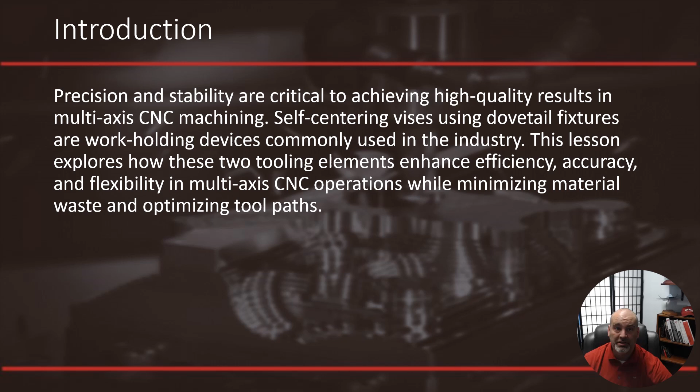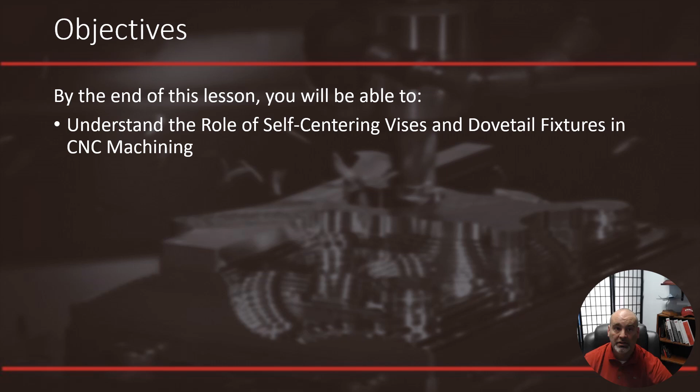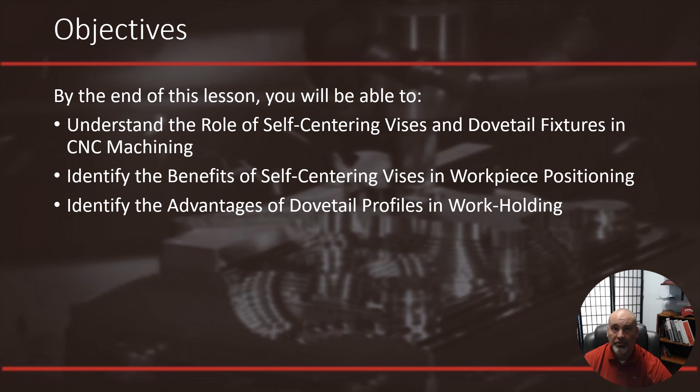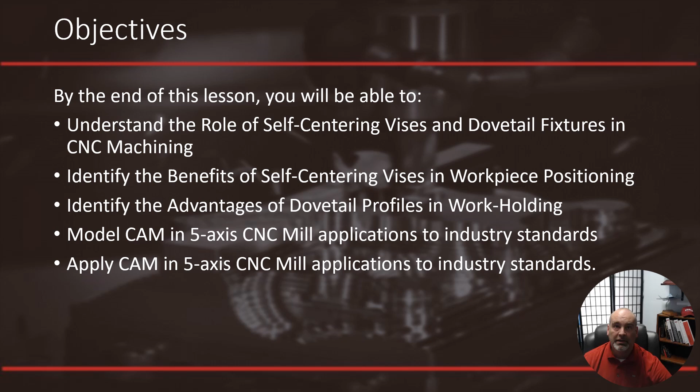The objectives of this lesson are that by the end of it, you will be able to understand the role of self-centering vices and dovetail fixtures in CNC machining, identify the benefits of self-centering vices in workpiece positioning, identify the advantages of dovetail profiles in work holding, model CAM in 5-axis CNC milling applications to industry standards, and apply CAM in 5-axis CNC milling applications to industry standards.

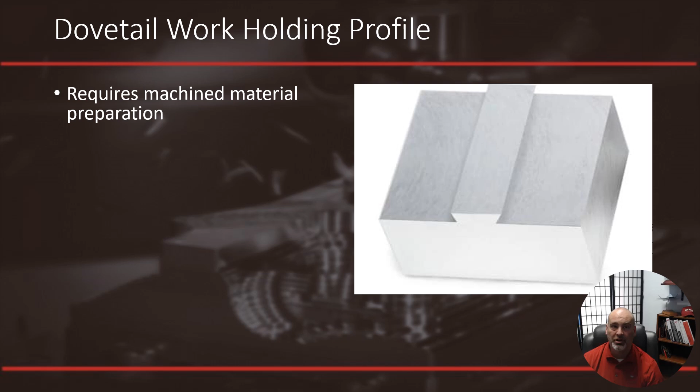The dovetail profile requires machined material preparation. So when you're planning your job, you have to think of this pre-operation or material prep as another operation in your manufacturing process. If you're looking to move a two-axis or three-axis part to 5-axis technology and it's only two operations, you may pause, because you first have to machine the blank to give the profile to grip onto, and then after it comes off the 5-axis machine, that dovetail has to be machined off. So it's adding two operations to whatever operations are done on the 5-axis. You want to gain that your total net number of operations is reduced by implementing 4 or 5-axis manufacturing processes.

The dovetail angle and specification vary by manufacturer. Some devices incorporate a pin to locate the material blank and to prevent the blank from being misloaded. But again, that's another feature that has to be machined in order to prepare the material to start work.

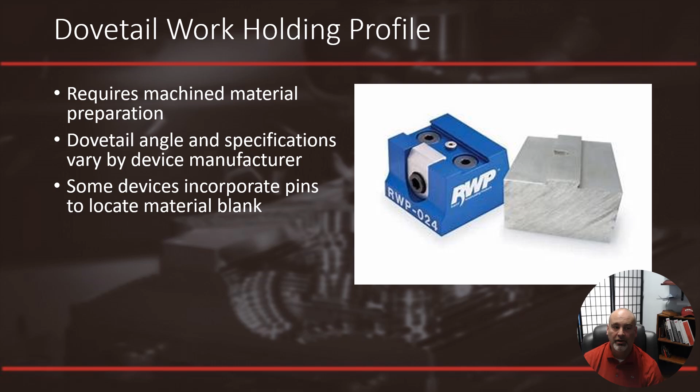The advantages of the system are a very strong gripping force on a minimal contact surface, and the grip profiles can be as thin as 80 thousandths. I've seen anywhere between 1/8 inch and 80 thousandths, depending on the system. The primary advantage is it allows free access to all sides of the part except for what's being held onto in a very small surface area, and allows you to do machining without having to avoid clamps and other types of bulky fixtures.

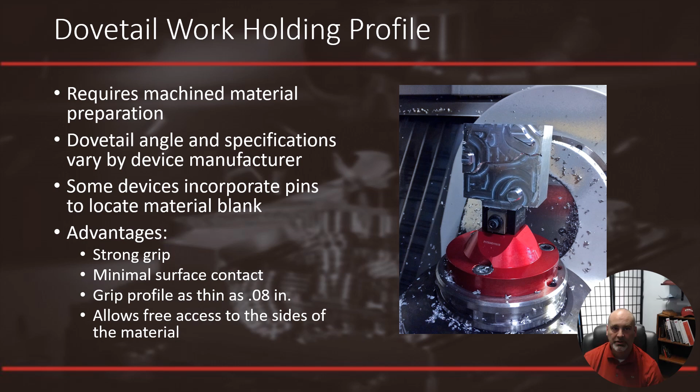Now, self-centering vices have become very popular in 5-axis work, primarily because they can hold workpieces of varying widths without moving the center line. You could clamp two different width blocks, and your origin, if it's centered on the vise, will remain centered on the vise. So it accommodates a variety of stock sizes without shifting your work coordinate system, or WCS.

This reduces setup time and also reduces the amount of misload errors, because the clamping technique is the same across a section of parts, so the operator doesn't have multiple training opportunities where they could misload a part. And it reduces the need to fabricate and inventory custom fixtures, which becomes a problem for a manufacturing operation where you have a whole inventory of fixtures and the setup and maintenance related to that.

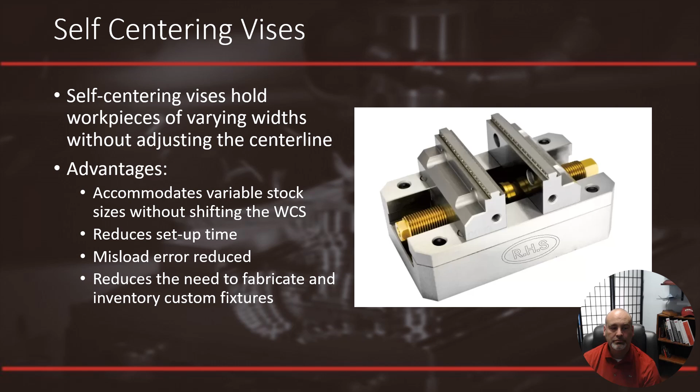Now let's look at some brands, a survey of 3 different work holding systems that use the technology we're talking about in this lecture. Raptor is a system we early adopted at Sierra College, and they do make self-centering vises. The taper angle on their work holding system is 60 degrees for material preparation. The advantage of the 60-degree angle is it puts a significant amount of downforce on the part, but the downside is you have a taller profile than some of the other systems, so you have to have a thicker amount of material devoted to holding the part.

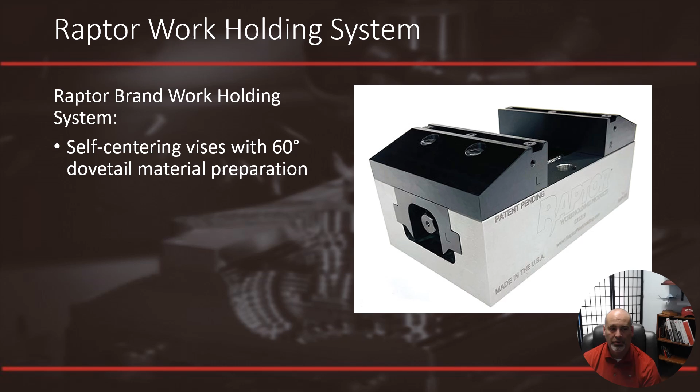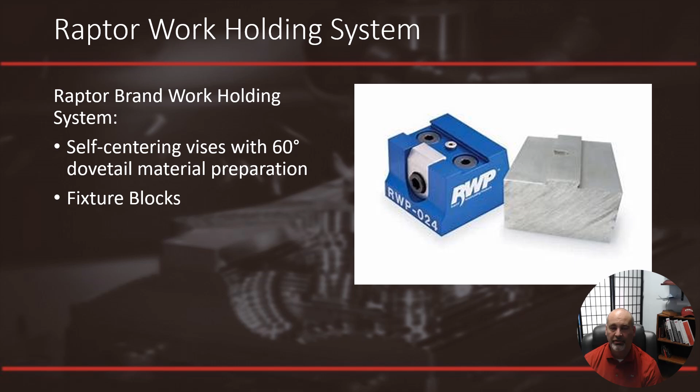They start out with these fixture blocks, and again they have the little locating pin. The one reason we're moving away from this at Sierra College is the tolerance requirements for their blanks are very high, for both the height of the dovetail and the location of that center notch that corresponds with the locating button. If we have to put a lot of precise care into the blanks, then it kind of defeats the purpose in some ways of having a quick preparatory operation.

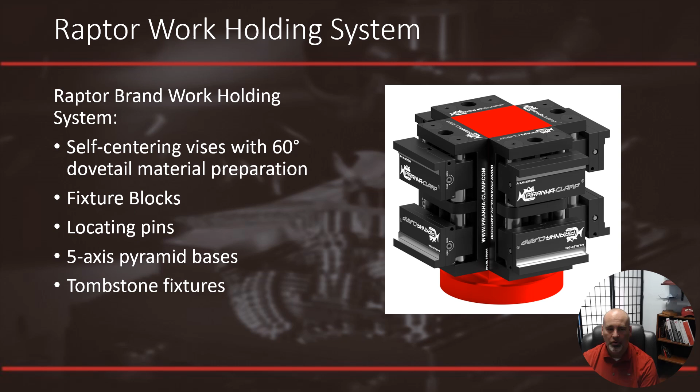And then they also make 5-axis pyramid bases. This one holds 3 fixtures and tombstone fixtures, which allows you to do multiple part loads on your 4 and 5-axis equipment. The tombstone type is typically on a 4th axis, whether that be a vertical mill with an A or B axis rotary, or on a horizontal mill with a B rotation.

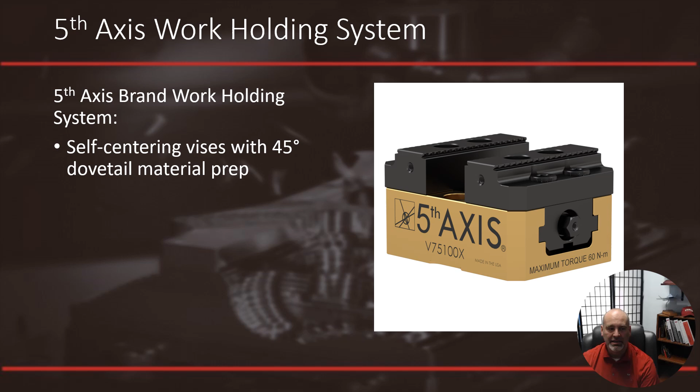Okay, Fifth Axis brand. It's quite apropos that they just call their company Fifth Axis. They make self-centering vises. The dovetail profile in their system is 45 degrees.

And they also make fixture blocks similar to the Raptor system. Looks like they incorporate a locating button in a different location. And they do make 5-axis pyramid bases that those can go on.

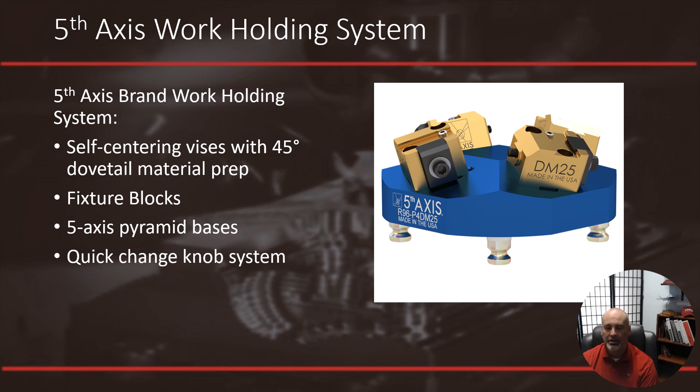And they feature a quick change tooling knob system, so you can quickly remove this from a subplate and slap on another one of their systems, and they repeat within a few tenths. So that's an advantage of that system.

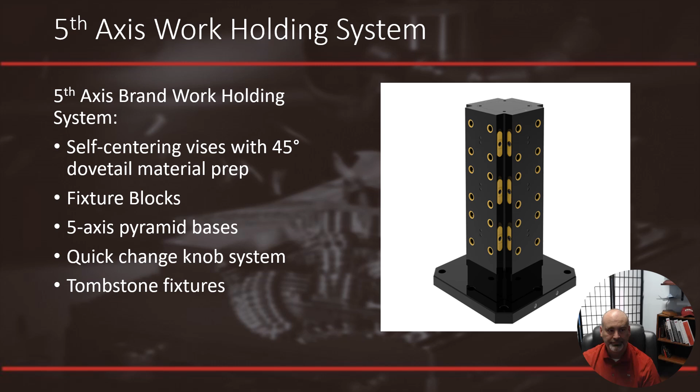Techni-Grip is another system. It's been around for a while that I've worked with at Schilling Robotics. And it also uses a 60-degree profile, but its clamping mechanism is different. It's modular. The idea is the fixture can be reconfigured for different jobs.

This is an example of one of their fixtures for a 5-axis machine. But their primary bread and butter product is this modular fixture system. And as you can look at the end of this, you can see that the clamps in this can be moved around to different locations.

And then on top, they have locating buttons that can be exposed by unscrewing them, or screwed down so they're flush.

Again, it incorporates a 60-degree dovetail, which puts more down pressure, but you have to have an 1/8 inch minimum dovetail profile to hold on to their system.

And the configurable clamp and pin location systems are alphanumerically labeled, with the letter being the clamp location on the fixture and the number being the pin location. So in your work instructions, you can tell the setup operator that you need a certain configuration.

So in this example, the documentation would say put a clamp in location B and E and raise location buttons in either locations 2, 3, or 4, and then that corresponding slot would be machined into the prep of the block. It not only locates the block in the opposite axis as the dovetail, but it also acts as a load protection.

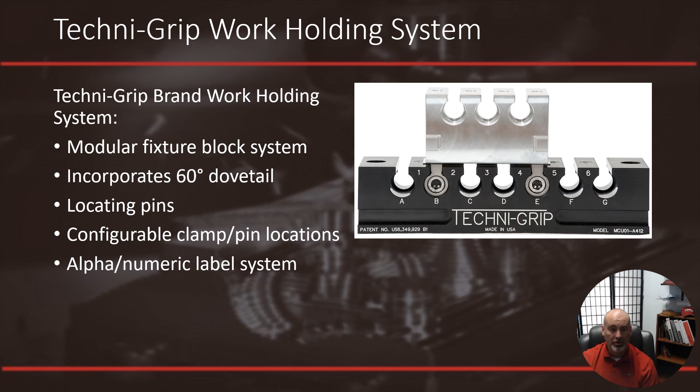So here's an example of a longer fixture with a part on it. They've got a clamp in location D, F, I, and L, and then somewhere there's at least 1 or 2 location buttons that are raised up that are hidden by the part, so that only that blank can go in that specific location.

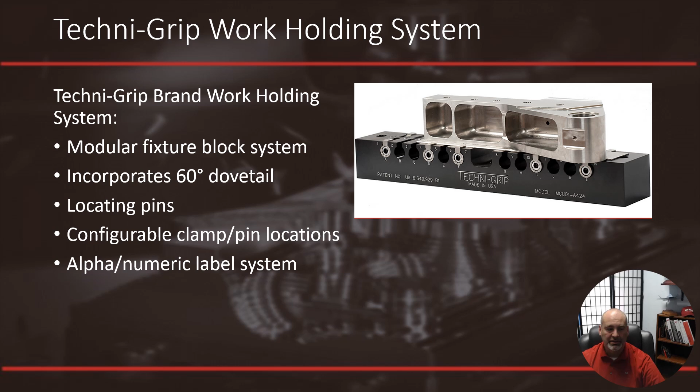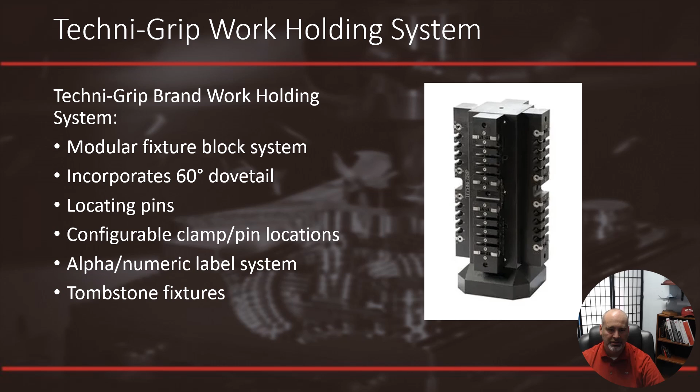And they also make tombstone fixtures, similar configuration. Typically you need a minimum of 2 clamps, and then the location buttons or pins are already in the system.

All right, so in summary, precision and stability are critical to achieving high quality results in multi-axis CNC machining. Self-centering vices using dovetail fixtures provide this, and they're work holding devices commonly used in the 4 and 5 axis industry.

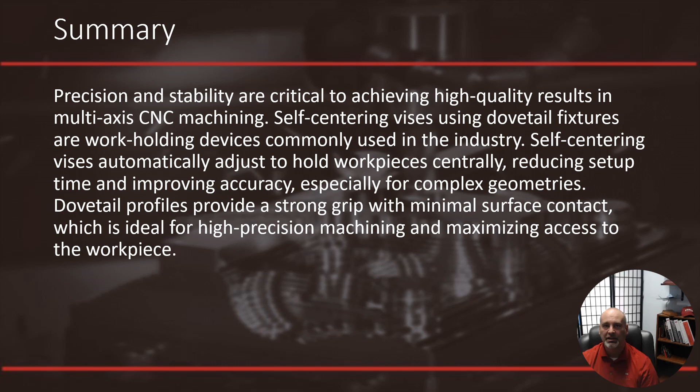Self-centering vices automatically adjust to hold the workpieces around a center point, which reduces setup time and improves accuracy, especially for complex geometries. And the dovetail profiles provide a strong grip with minimal surface contact, which is ideal for high precision machining and maximizing access to the workpiece.

In conclusion, by the end of this lesson, you were able to understand the role of self-centering vices and dovetail fixtures in CNC machining, identify the benefits of self-centering vices in workpiece positioning, and identify the advantages of dovetail profiles in work holding.

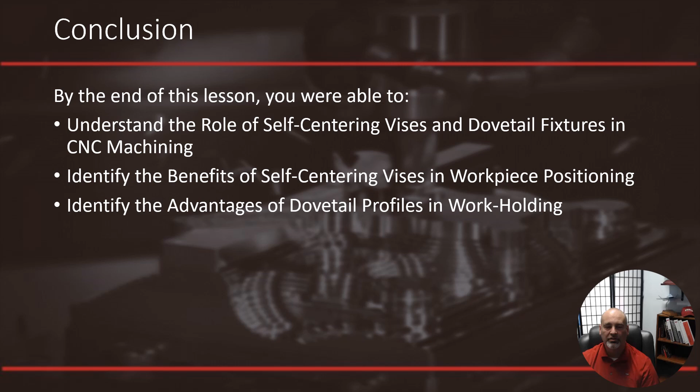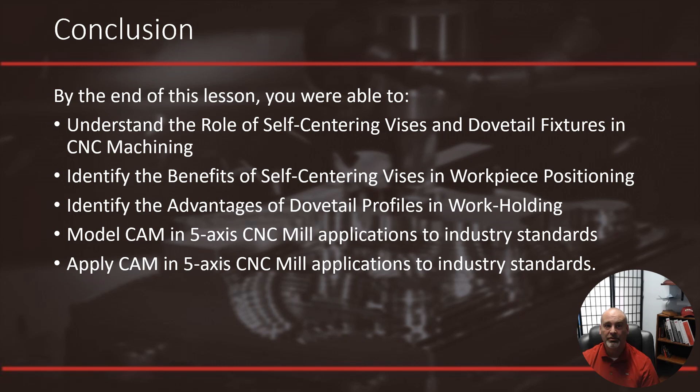Model CAM in 5-axis CNC mill applications to industry standards, which you'll be doing in your assignments, and apply CAM in 5-axis mill applications to industry standards, which you'll be applying to machined parts you make in the lab, which will be held onto by a dovetail type vice system.